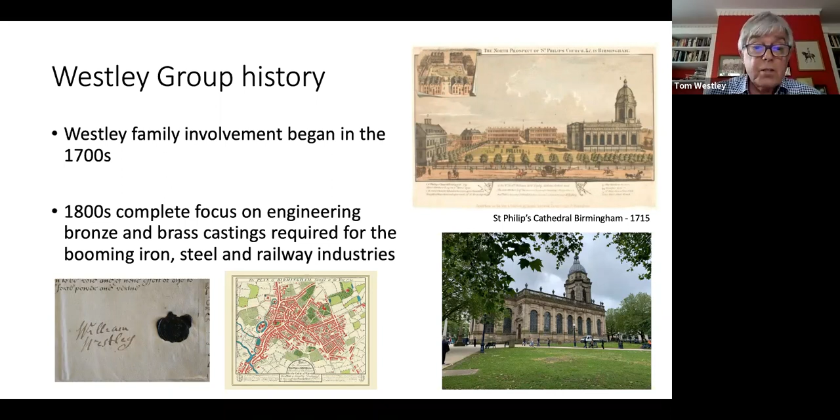So what happened subsequent to that was we really started a proper bronze foundry, so to speak, on an industrial scale in 1800. And that was set up in Dudley in the West Midlands. And it was set up to support the operations of the then Earl of Dudley, whose ironworks were very substantial. They became the Round Oak Steelworks in Brierley Hill and Dudley.

And it was in order to help him that we were making the bearings which were used in the rolling mills and the production of iron. Well, it wasn't steel then, it was iron then. And that's what caused us to make the step of building a really half decent sized foundry to support these growing iron activities.

So this went on largely all the way through the Victorian times. And of course, the railways were a marvelous opportunity for us, because all the bogies and rolling stock had bronze bearings on them too. So we really lived happily off just making bearings for railways and steel mills and all that sort of metal processing equipment, mechanical presses, and all the equipment that was needed right through and during the Second World War and beyond.

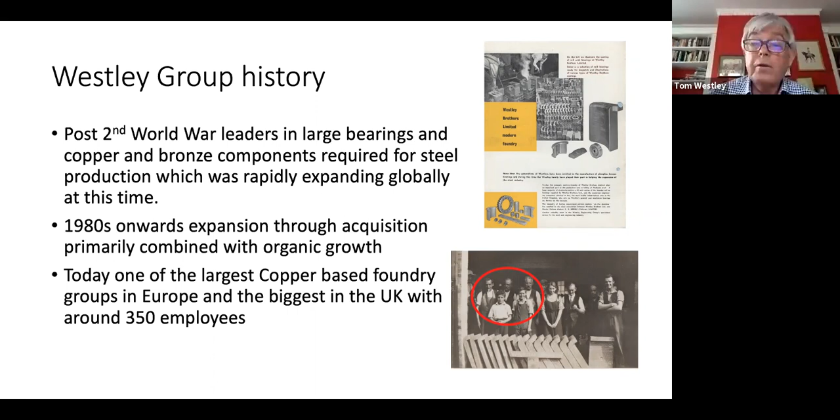As it says on the slide, we're one of the largest copper-based foundry groups in Europe. So our competitors today tend to be European or American rather than in the UK particularly.

We didn't necessarily buy them all, we bought some, but a lot of shipyards used to operate their own foundries for their own purposes, like Swan Hunter and Vosper Thornycroft and Rosyth and Yarrow Shipbuilders. Similarly, a lot of the steel works had their own tied foundries, as they described them. And also people like David Brown had the foundry to support their gear activities and whatever else.

But bit by bit, we endeavored to take on the activities of those foundries, do it on a larger scale under one set of overheads, and give benefit to the customers of a more profound and more diverse service, taking full advantage of all the technologies that we brought to it.

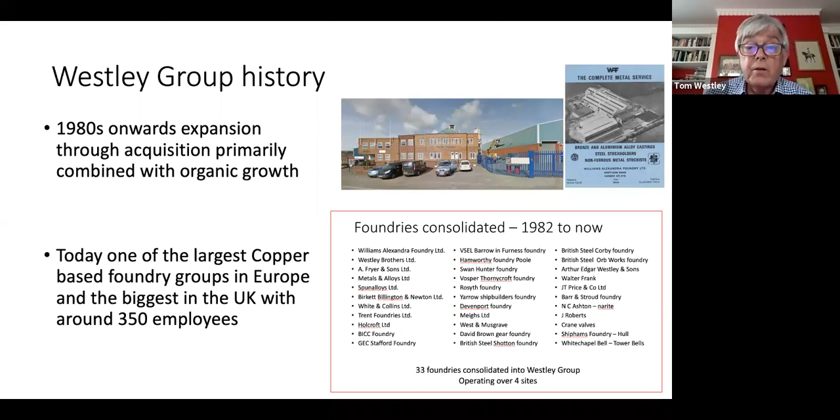So today, as it says here, we're about 350 employees, and we actually operate from 4 sites today. And the reason for that is because each site represents a process, and the skills and the people that we need to do different activities are very particular for the process. So the original site, which is our Cradley Heath site today, exclusively makes centrifugal cast product. So you can see the sorts of things in some of these pictures.

For people that don't know, centrifugal casting, you pour molten metal into a rotating steel mold, and you can only make cylindrical shapes. But the process itself, because of centrifugal forces, can give extreme pressures while the metal is solidifying. So you get the quality of a forging out of a casting, because the extreme gravitational forces squeeze the metal against the edge and give an excellent product.

And so typical examples here are ships' bearings. And we probably export, I don't know, 60–70% of what we make here to merchant ships around the world, even for the US Navy and Coast Guard and other people who are using these types of components. Safety critical stuff as well for the nuclear power industry, and column pipes and these rising mains.

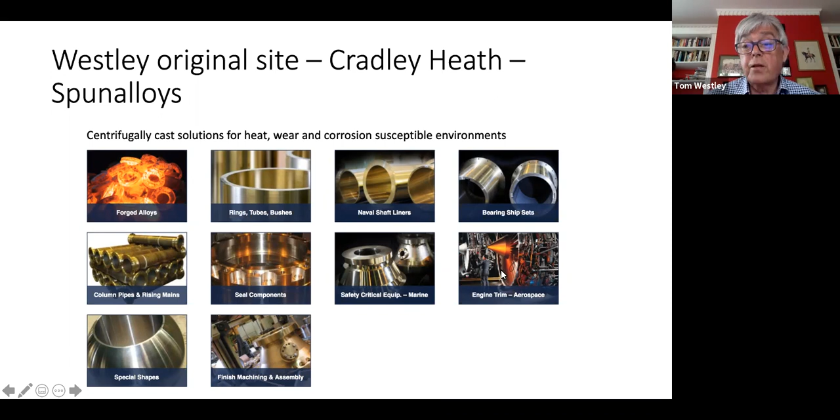These are all to do with the oil industry for extracting oil from offshore platforms and for firefighting systems that are associated with that. And then down to some quite small and sophisticated bits that go into Rolls-Royce aero engines. They're the bearings and the seals that fit in the aero engine.

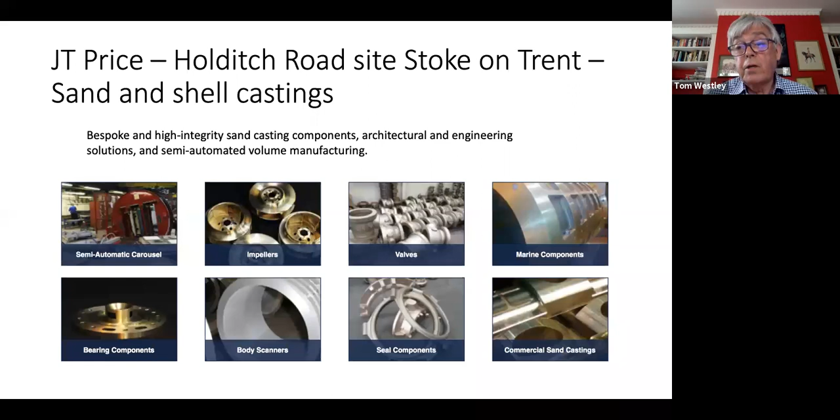So then the other site, which was called JT Price, this is up at Newcastle under Lyme, close to Stoke. This has always focused on sand casting, and this is our centre of excellence for sand casting, and it's actually this site that casts the bells. But we make all sorts of shapes there, pumps, valves, you can see from the pictures, and even parts for body scanners, and it's quite diverse. But each of the sites, by the way, employ around 100 people.

So other products that the JT Price site makes at Newcastle under Lyme are associated with artwork, and I think the bell production is probably quite closely aligned with what we do in the art world, but also increasingly as part of buildings, like facades for buildings. With our desire to become more and more green, prestigious buildings now are built with a facade that will basically be zero maintenance and not deteriorate.

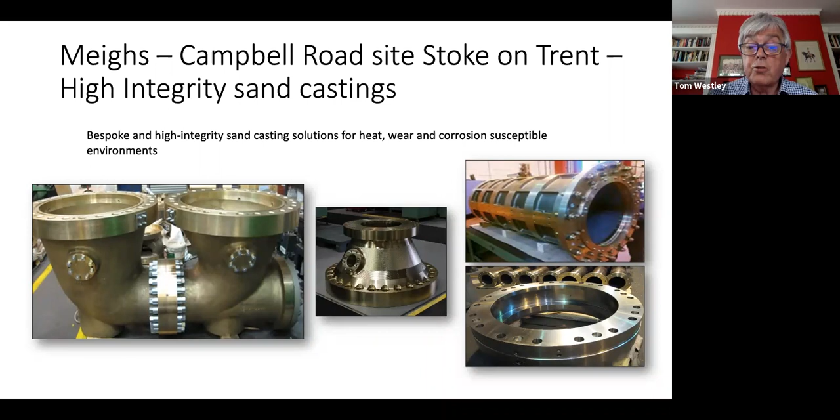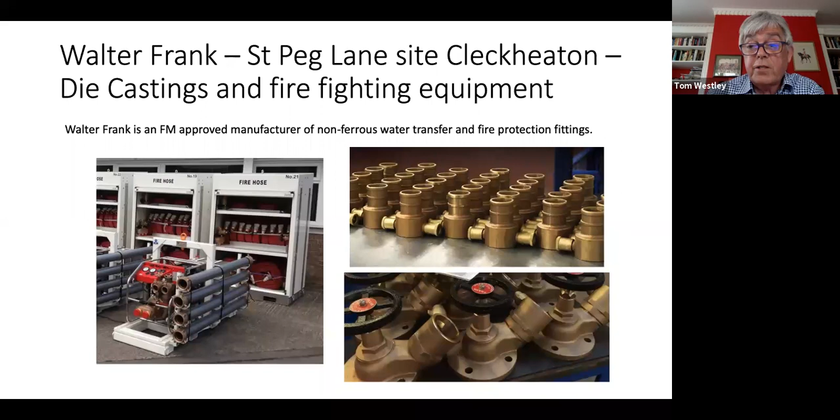So the other site, the last site, is up in West Yorkshire, Cleckheaton, and this is focused on die castings for the firefighting equipment. So that's what we do there. And if you look at the modern fire engine, the bits of kit on the back and the things that stand up in the street, all those connection parts, many of them are made by us as a product that meets all the British and international standards for firefighting. That's a company called Walter Frank.

So, having given that bit of ground to what Westley Group does, which is quite diverse, we'll move on to bell casting, because bell casting was something which we'd not really indulged ourselves with. We had made a few bells for, I think, locomotives and ships, which were literally one-off pieces, but they certainly weren't tuned proper bells, if I could say that.

And so the engagement with Whitechapel has been an education for me, as well as all our people, to see and begin to understand what is necessary and how bells have evolved and all of it. And I must say, I've found it extremely interesting.

The thing which surely fascinates everyone as well is the ancient history of bell founding. I mean, we go back thousands of years, and experiments to see what works best and how best to do it have been going on really throughout the entire period. The outcomes, however, were often quite variable, which without science and technology at its highest levels, it was a bit of a challenge to make a bell and be absolutely confident that it was going to be perfectly okay.

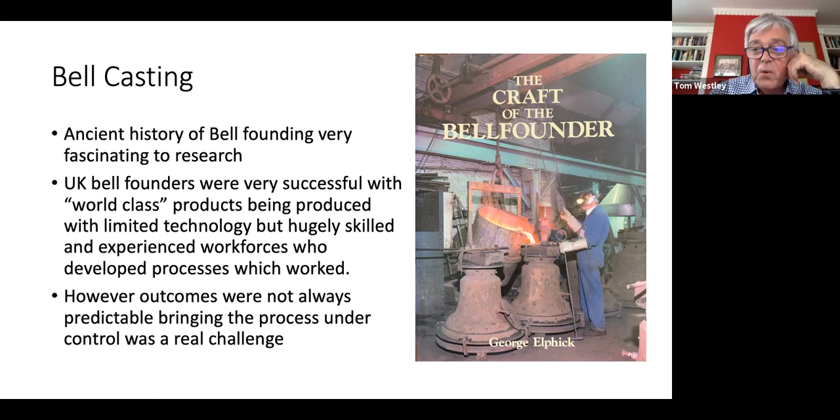But of course, as with everything in human life, it's about the people, and the experienced foundries that were good and competent succeeded, and those that failed often failed. So it's been interesting to learn about the more successful ones and how it's evolved. And so from our perspective, we have stuck with the notion of just trying to make the very best bell as a casting, and we'll come on to that in a minute.

So Whitechapel Bells has got probably the most illustrious history of any bell making company. You all know, without me telling you, I'm sure, that they made the Liberty Bell and the Big Ben bell, that is, well, Big Ben itself, that is the bell, and of course they were established way back in the 1500s.

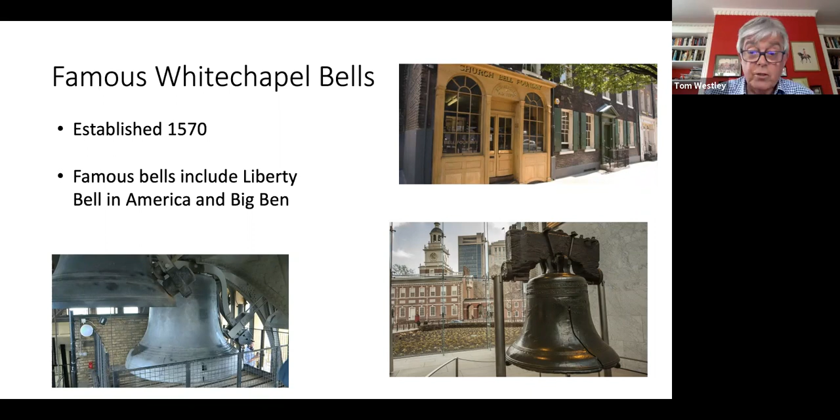So, as I was saying, the casting process is a challenge. Engineering activities, one of the few things, the actual casting process where you begin the pour is unique, because everything has to be correct every day in a few seconds where you're actually doing the pour.

And things that have to be right are the temperature of the metal must be right, the metal composition must be precisely right, the gas content of the metal must be as little as possible, the mold preparation has to be right, and indeed the pouring technique, how you get the metal from the ladle into the mold, has become more and more of an engineering challenge to do that in a manner that makes the flow of the metal as quiescent, as gentle as it can be, in order to protect the quality of the metal stream. And all this needs to be optimized at the same moment for the few minutes when the pour actually takes place. So there's our challenge.

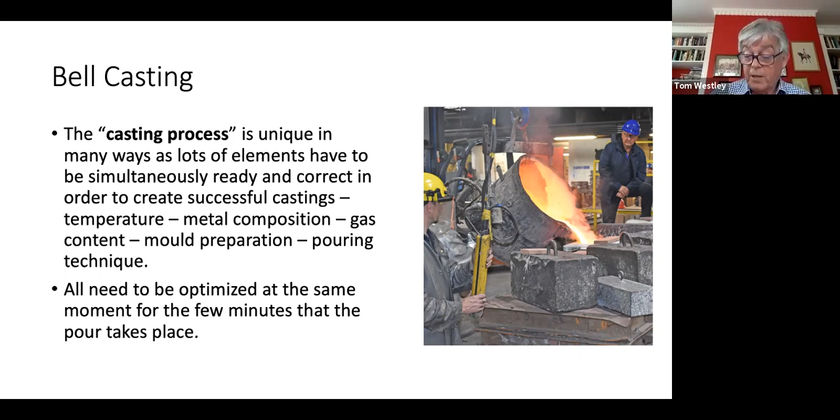So Westley Group's philosophy towards bell founding is that we recognize our forte, as I was saying earlier, we know an awful lot about copper-based alloys, but it's principally about making what I would describe as a high integrity engineering casting. That's to say, we want it as defect-free as is humanly possible.

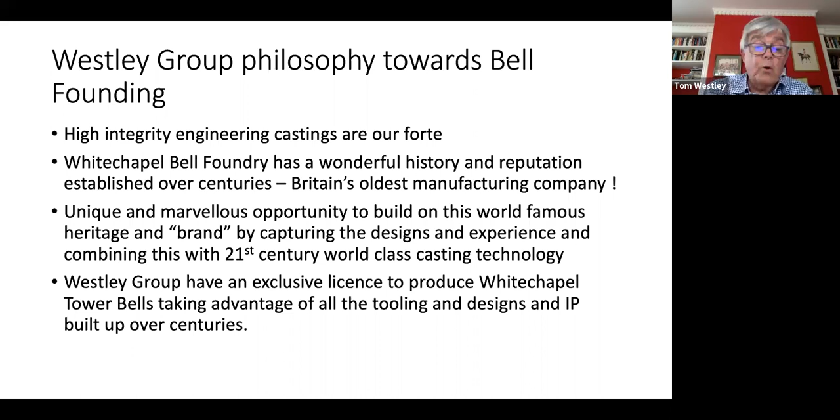And the real opportunity with Whitechapel, given their fantastic portfolio of shapes and sizes and back catalogue of things they've done, was to take those dimensions and shapes and see what we could do to promote the brand, develop the brand, and make the most excellent castings that we can, to see if we can make something better than has ever been made before. That's our philosophy, and that's what we're trying to achieve.

So design and the shape, obviously very important, and we work with people, not least Nigel Taylor and others, to make sure we try and get these designs and shapes as authentic and correct as we possibly can.

We do use a different technique to the traditional way of producing a mold for a bell, which was to strickle it. We call it strickling. You shape it by moving from a central axis to create the shape in a loam sand, which is sort of what we call green sand with manure and things in it to bind it.

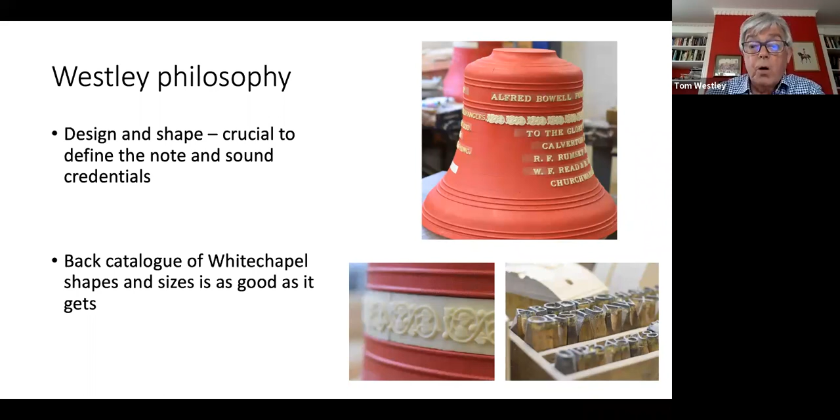But that's all very Victorian and quite difficult and very time consuming. So we go through a different route to create the mold using modern materials and techniques. And that is what we've done to make sure we can build the best product that we can.

So the decorations and dedications are all, as we know, bespoke, and it can be quite challenging to get them exactly right. But again, we've learned, and we started from a zero base in the beginning, and we've now made a lot of bells for a lot of people, and we've got, if I dare say, quite a bit better at getting things exactly and precisely as they should be from that perspective.

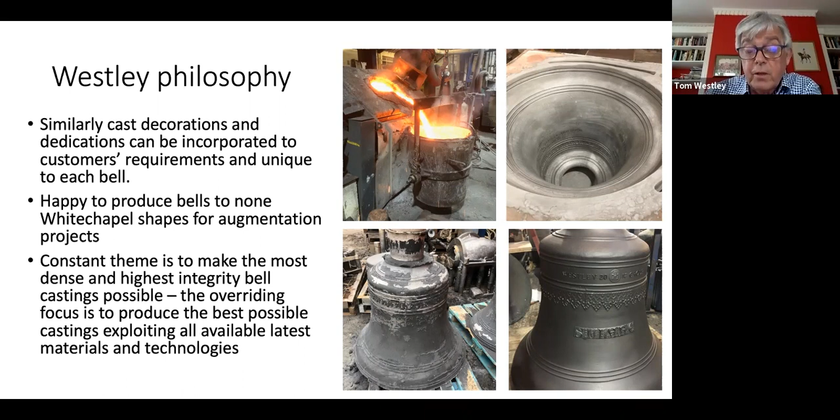But as we were saying before, it's all about making the most dense and best possible product. And you can see some pictures there just to give you a feel of what they look like when they're cracked out of the mold. So what makes the best casting? We want no dissolved gases in the molten metal, and there are techniques we can use for that.

We want no shrinkage. Alan Hughes has told me many times that he used to imagine that the lack of adequate feeding made a sort of more homogeneous thing that just worked. We weren't quite sure. But actually, if you're trying to create a casting that has got no voids in it, then you need to cast it in an orientation and feed it with liquid metal in a way that leaves no voids that would otherwise appear through shrinkage.

We want no insoluble particulates. It's very easy to get stuff that's ceramics and bits and pieces mixed with the metal stream. We want no oxide films. So this comes back to having a pouring technique that keeps the metal in a nice, gentle flowing stream and not all churned up in a turbulent manner as you fill the mold cavity.

We want no contaminants in the alloy; particularly lead and aluminium are disastrous, even in very small quantities, because they damage the grain boundaries and the properties of the metal to ring. We need a very precise control of the chemical composition, because we do want to get the optimum and brightest note at the same time as not making the bell brittle.

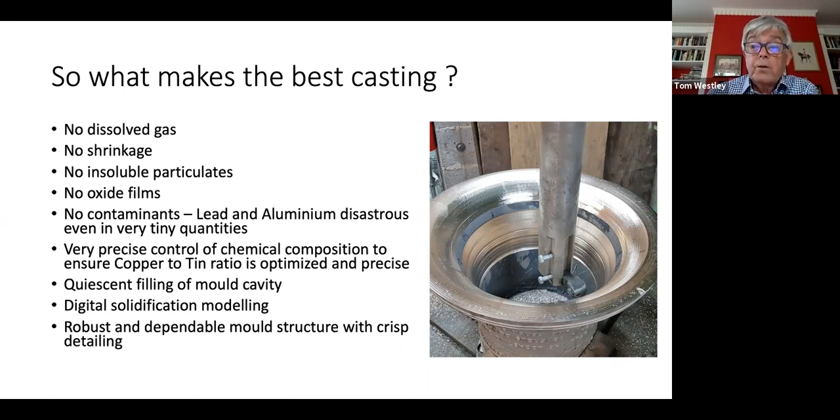So we do vary it. We have a little less tin in ones that are very big and a little more tin in ones that are small, but it's all closely controlled. Quiescent filling I've spoken about. And then the other thing today which we have at our disposal is digital solidification modeling. And that's something which Whitechapel has been at the forefront of since computers became powerful enough to enable us to model some of the flowing and how to fill the mold. So how do we get this control?

We use electric melting. Every bit of metal that goes into our bells is melted through electric induction furnaces, which gives us great control over temperatures. We can use nitrogen purging to get the gas content, and we use spectrometry. Again, modern computing power has made spectrometers so good that within a space of a few seconds almost from taking a sample, we can have a composition and we can adjust it and get it all exactly right.

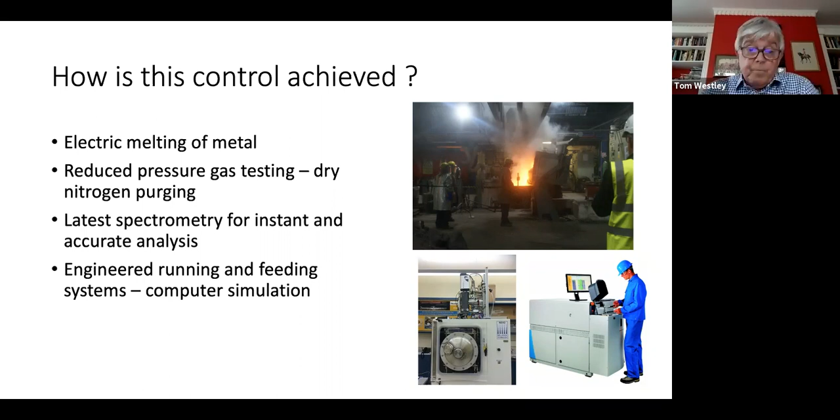And then the running and feeding systems are optimized by computer simulation. And that's exactly what we do. Professor Campbell, who is retired now, was on our board for many years. He was head of the casting department at Birmingham University. And it was he and a chap called Mark Jolly, who's now at Cranfield, who developed many of these early software programs to optimize how you fill a mold. They were sponsored by Jaguar Cars and Westleys, and a lot of the data that we needed for copper-based alloys we developed between us for just that purpose.

And then the sand system: these days, we don't use anything that's got moisture in it. They're sort of polymer type binders on sands, which we optimize to give the permeability and the venting that we need to make sure that there's no blows or sort of folds in the metal that would be very damaging. And then the pattern equipment, and this is where we again are very engaged with computer-aided designs. We actually make the pattern equipment and use the 3D modeling and so on, so the patterns can be as accurate as possible.

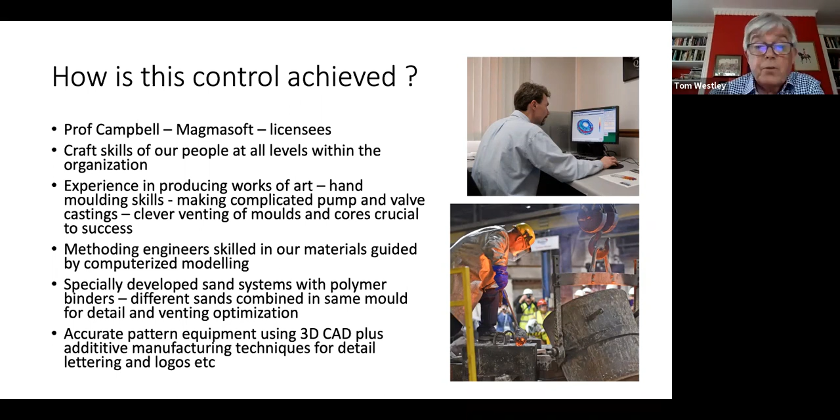So the metallurgy, and I don't want to go too technical here, but copper-tin alloys are especially interesting because they have peculiar characteristics when you get the tin content to a very high level. Lower levels of tin, which is what most of our bearing alloys is and where most of my experience has been in the past, they have a very good lubricity, as we call it, very slippery, so that's what makes them into really good bearings. But when you go beyond 20% of tin, you're making an alloy that is extremely hard.

And the little diagram on the side there is called a phase diagram. And I won't blind you with science, but these tin alloys are strange because the crystalline structure of copper is a face centered cubic, we call it, which is like the crystal alignment of it. And tin is a tetragonal crystal structure. So when the two things get mixed together, they have to accommodate each other by forming discrete phases, the eutectoids.

And this is what's strange about copper and tin. There's so many of them. You've got Cu10Sn3, you've got Cu6Sn5, Cu3Sn, Cu41Sn11. These are all ratios of copper and tin which form discrete phases and eutectoids and eutectics. And why that's important is because they don't marry up perfectly across the crystal structure. They all bash into each other at the grain boundaries. And what that does between the grain boundaries is that it locks it all up solid.

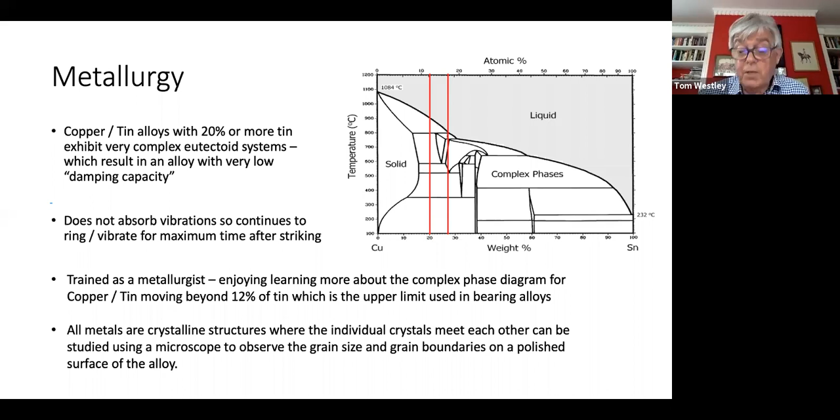Right. So the effect of defects in castings is pretty bad, and we're just making little notes here as an aide-memoire. Anything that's a defect contained within the metal is effectively a nucleation site. So when the bell is vibrating away and gets hit and so on, if there is any defect embedded in there, that would be a starting point for something bad to happen, for a crack to originate from. And so the way to avoid that is to eliminate these nucleation sites by getting very clean metal. And we've been over that now as to how we achieve that.

And it's interesting, very briefly, so that people have an understanding of the difference that clean metal makes. As an example, I'll show you what's happened with steel alloys. The highest quality steel alloys now that would go into the crankshafts of a petrol engine or the main shaft that runs through a modern jet engine, they will melt that metal 3 times over under vacuum to extract all these things that I'm saying are difficult and dangerous. And the difference that makes to the fatigue life of those components is not a little bit better, it's enormous. You can put a shaft through a jet engine now which will last the entire life of the jet engine.

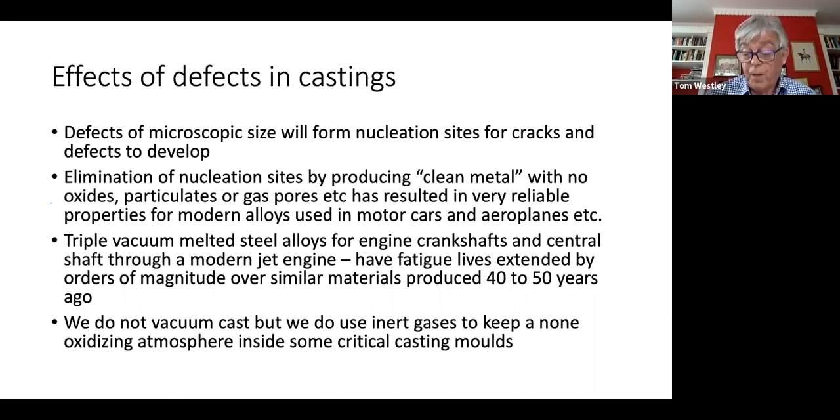So now I want to move a little bit to what I've described as some rumours and untruths, just so we can talk about it. It is not true that bells deteriorate over time. A properly designed bell will, when struck with an appropriate clapper, be working well within its elastic limits, and the stress levels should be so little that they will not induce fatigue or any failure. And that's exemplified by good bells that are still being used after many hundreds of years of service.

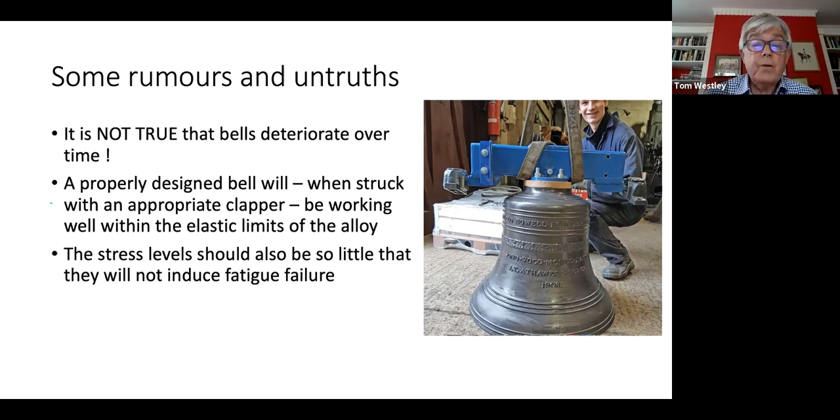So that's the good news about making something in metal. It does not deteriorate if the original cast product has got the integrity that it should have. So they are massively over-designed as a product, and the idea is that they should not absorb the energy from the strike, but rather let it keep reverberating round. And it's very fascinating how long a bell, which you know better than me probably, will continue to sound after you've struck it. So weight is not an issue in bells like it is with other of our more highly engineered products. And the most important thing is simply to make it a high integrity, clean cast part.

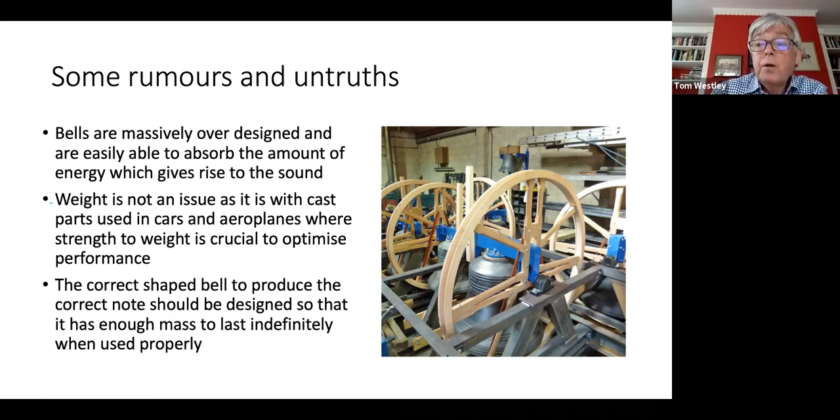The correct shaped bell will make the right note within reason, and obviously after that it becomes tuned, and again with modern machinery for electronic tuning, that can be done to a level that wasn't possible in the past. So modern bells are probably better tuned than ever.

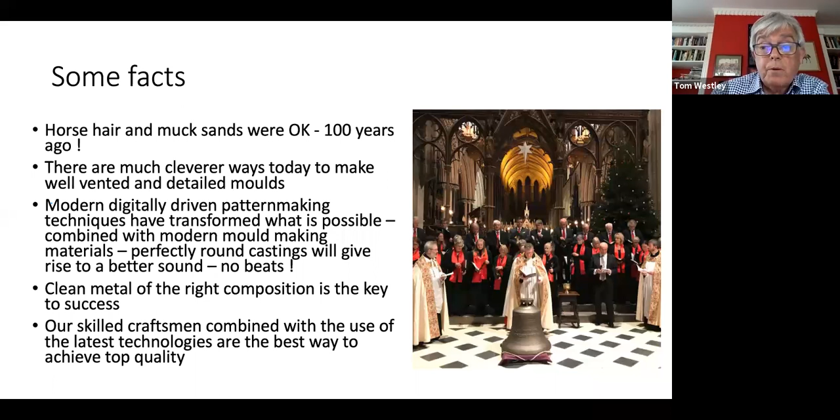And so now I'll move to what I've described as some facts. That horsehair and muck sands, which were the traditional way of making a mold for a bell, were okay 100 years ago. But we honestly believe that it's so much cleverer to use all modern technologies just to make something which is in a different class. So that's what we do. The skilled people that we've got and what we've learned over the last few years, because we started making bells, I'm trying to think, first ones we made probably in 2018. I can't remember exactly how many, but we've made well over 100 tower bells in between times, probably more than that, but I haven't added them up precisely.

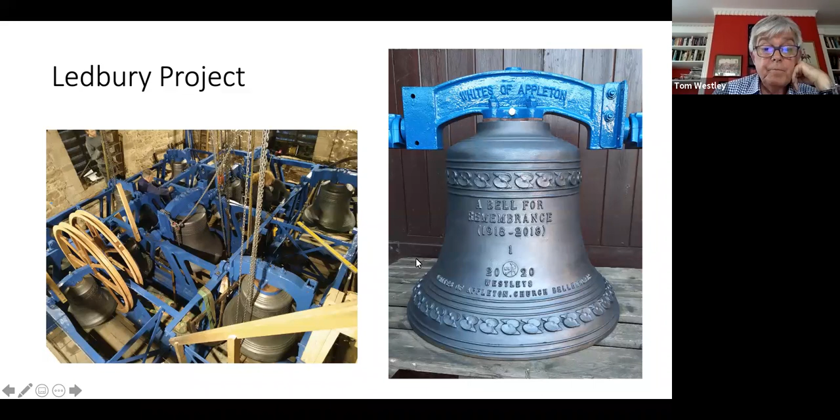We have on the go at the moment quite a few things which are being quoted for and debated. I don't know whether some of you may or may not be familiar with these places, Great Chishill and HMS Alfred, which I think is now on order. These are all current bells that we're working with and aiming to get.

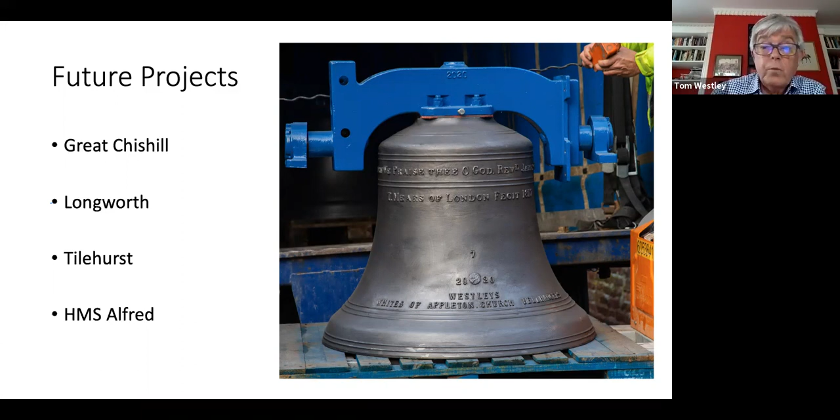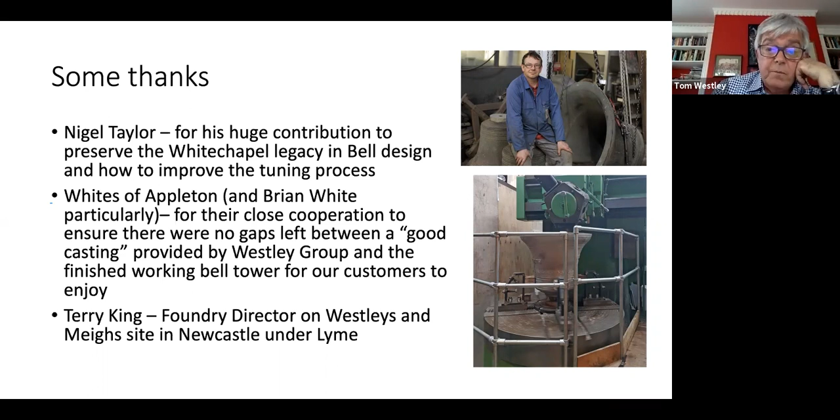I would like to say thank you to Nigel Taylor, who I think may be on this call, because he's been very helpful towards us throughout the whole process. Nigel was the main man at Whitechapel Bell Foundry for a long time and worked with Whites of Appleton as well, who we work in conjunction with because they tune the bells on their site and hang them. We just focus on getting the patterns and the castings of the optimum quality and then passing them on to Whites of Appleton and Nigel to complete the job. Terry King, who's a wonderful foundryman, who's my foundry director up at Newcastle under Lyme, has been particularly valuable in all his efforts to work out the systems and methods that we have to optimize production.

So it's fascinating that, in my opinion, the tower bells are obviously highly valued by the community and the bell ringing community, but I think bells and clocks in general have often formed the centerpiece of human communities located all over the UK in towns and city centres and from medieval times across the whole of Europe. So I find it fascinating to see how we might be able to bring some of this back to life again, to the extent that we can promote the fact that you can get much bigger and better bells than ever. And let's see if we can excite people to try and design some pieces that are not necessarily just to be used in churches.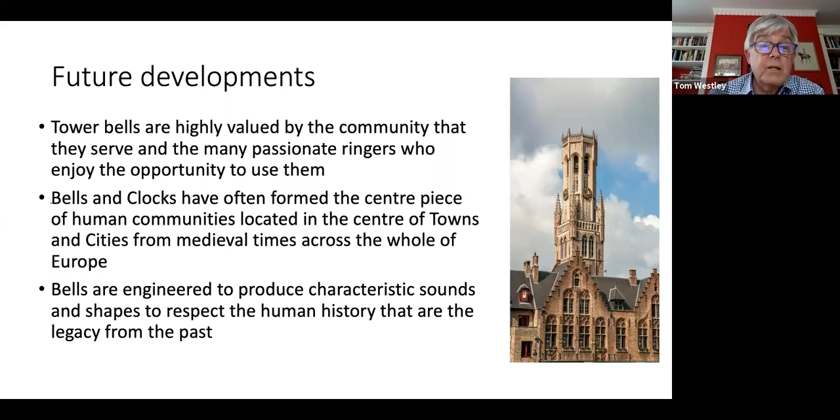It's quite interesting as well, because when you try and look at the marketing of bells, we find that each of the different countries and continents have their own traditions and alliances and allegiances. So it's quite a British thing. I mean, Whitechapel Bells in particular is a very British situation, and we stick to our own patches largely, even though we do have international competitors for some of these things. So we intend to respect all these traditions and maintain the Britishness of our bells.

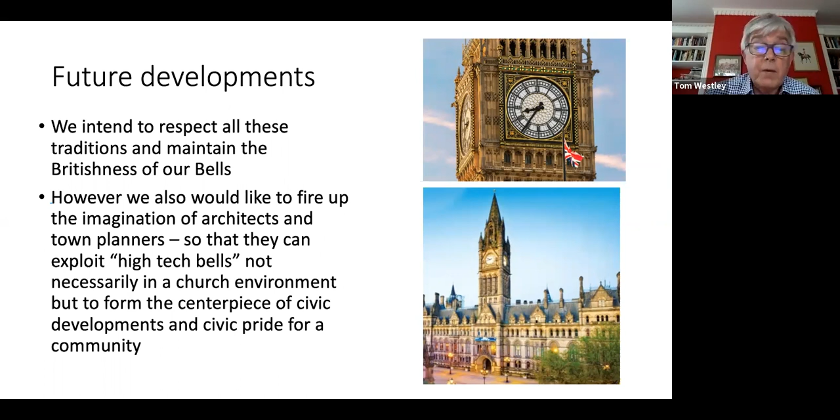But, as said a minute ago, we would like to try and fire up the imagination of some of our architects and town planners to see if we can get them excited about using bells more than they do. So that's really, at this point, as much as I was going to say.